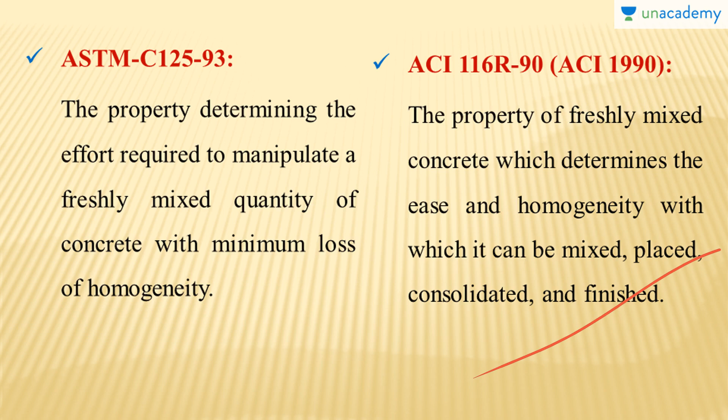Next we have another definition, that is ACI 116R-90. It states that it is a property of freshly mixed concrete which determines the ease and homogeneity with which it can be mixed, placed, consolidated and finished. That's one of the definitions that we are more familiar with, I suppose, because it directly states the easiness, the homogeneity, mixing, placing, consolidation and finishing. So I hope you understand both definitions.

Now let's move on to the quote about workability in IS 456 page 17. It quotes that the concrete mix proportion should be chosen such that the concrete is of adequate workability for the placing conditions of the concrete and can be properly compacted by the means available. This quote itself shows how important workability is for a freshly prepared concrete. So one has to choose the ingredients and the proportions based on the workability, so that it can be easily placed and properly compacted with the means available. I hope you understand the significance of workability.

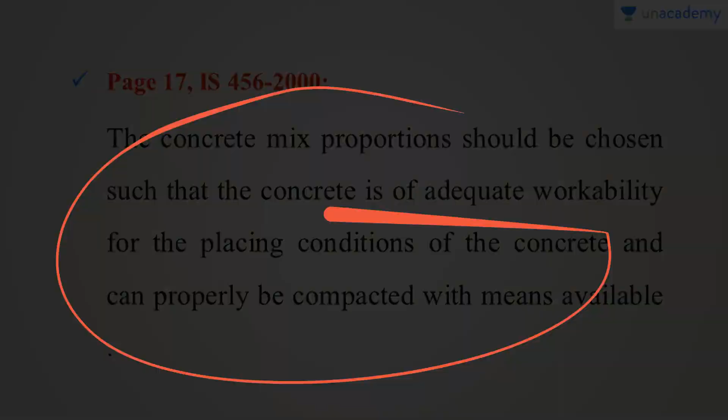Now let's move on to today's lesson, that is the effect of admixtures on the workability of concrete. Admixtures play a key role in workability in modern day constructions. Modern day constructions, and the modern philosophy of sustainable development, are hugely influenced by the introduction of admixtures to the construction world, so that we can save a lot of natural products like river sand and water.

Okay, now let's see what are the admixtures and how they affect the workability of concrete. Let's start from the admixture itself. As I said before, this is one of the most significant influencing factors in modern day construction, whether it is a small domestic one or a large construction, substructure or superstructure. Admixtures play a key role in the concrete when it is in its plastic state, its setting state, and also when it moves through the hardening state.

So what are admixtures? Admixtures are materials that are used as an ingredient of concrete, and they are added to the batch immediately before or during the mixing, or sometimes after the mixing, for specific purposes, like altering the properties of concrete in accordance to our need or the design. So I hope you understand what admixtures are.

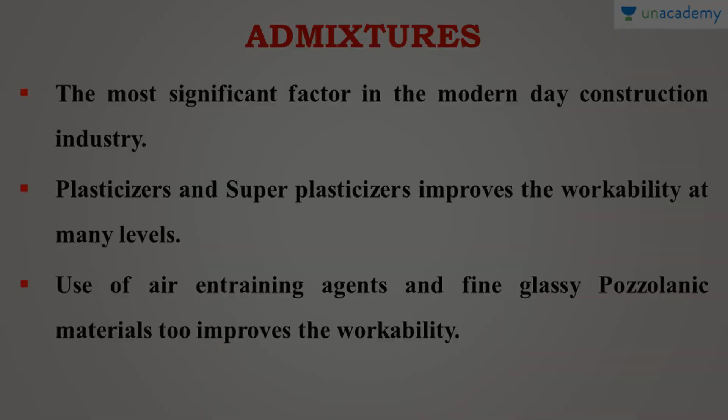Plasticizers are chemicals added to the wet concrete to impart adequate workability properties. Workability is one of the important factors for concrete in its plastic state, so to alter that, the chemicals mainly used are plasticizers. If the construction is too heavy, or the concrete used is a more modern type, like special concretes, we use super plasticizers.

So if somebody asks what a plasticizer is, we can say these are admixtures that are added to the wet concrete, that means concrete in its mixed state, to impart adequate workability properties. Please note down this sentence. It clearly shows what plasticizers are.

Plasticizers are often added with other cementitious products like pozzolanic ash. When other cementitious products like fly ash are added, there is a chance of reduction in the workability, especially if a huge amount of replacement is required, maybe a double replacement.

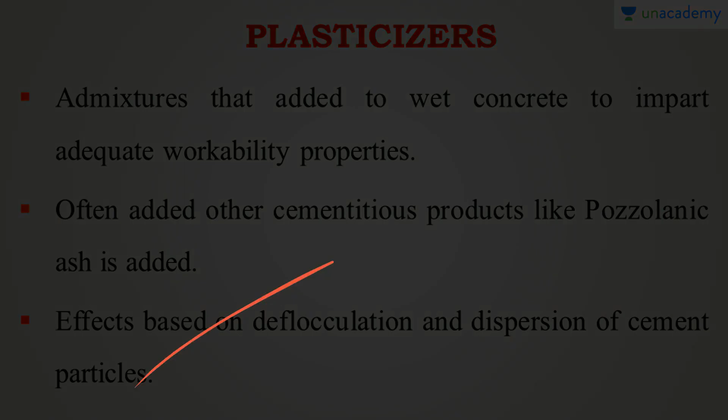Now let's move on to the superplasticizers. These are called high-range water reducers. They generally produce a homogeneous and cohesive concrete without the tendency of segregation and bleeding. That means the concrete will be very workable, but it doesn't go for segregation and bleeding. The basic principle of superplasticizers is the same as the plasticizer, but they are more powerful dispersing agents.

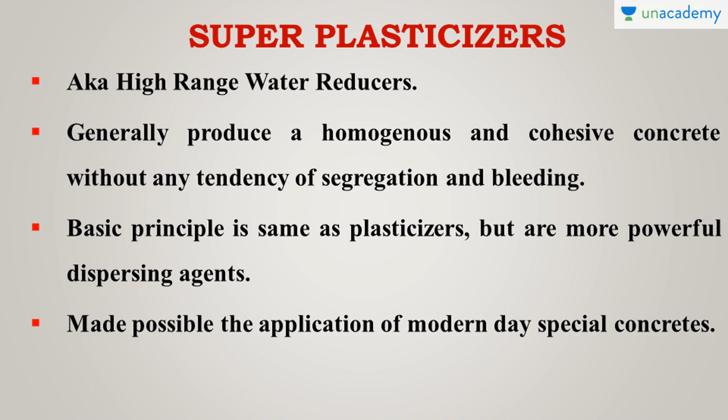By the addition of superplasticizers, modern day special concretes became possible, like high performance concrete, high strength concrete, etc. They also made it possible to do the mix design by reducing the water cement ratio to a very low amount, like 0.25. So these chemicals create such wonders. They impart a very high amount of workability to the concrete.

Silica fume can alter the workability depending upon the quantity used. It can improve the workability when replaced at a low rate, but if it is replaced in a very high amount, the workability will be less. It's like an inverse proportion. Slag cement also improves the workability, but its effect depends upon the characteristics of the concrete mix in which it is used. So I hope you understand that.